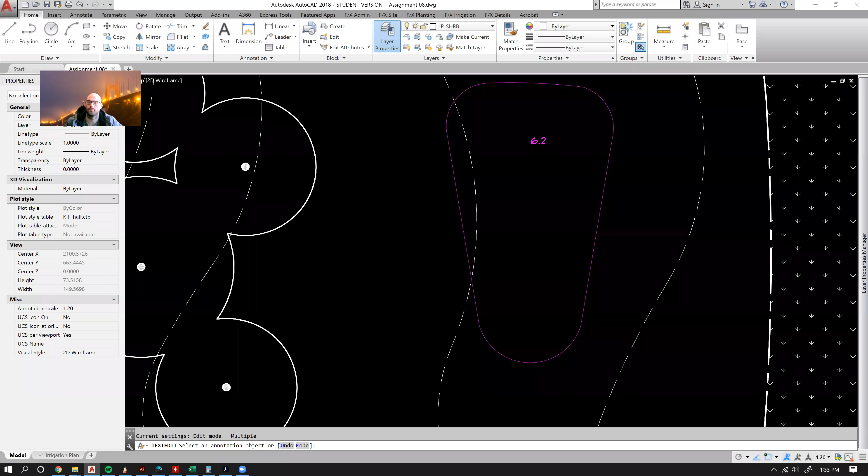So, oh man, now that just started recording. I feel like we should go through the instructions just a little bit.

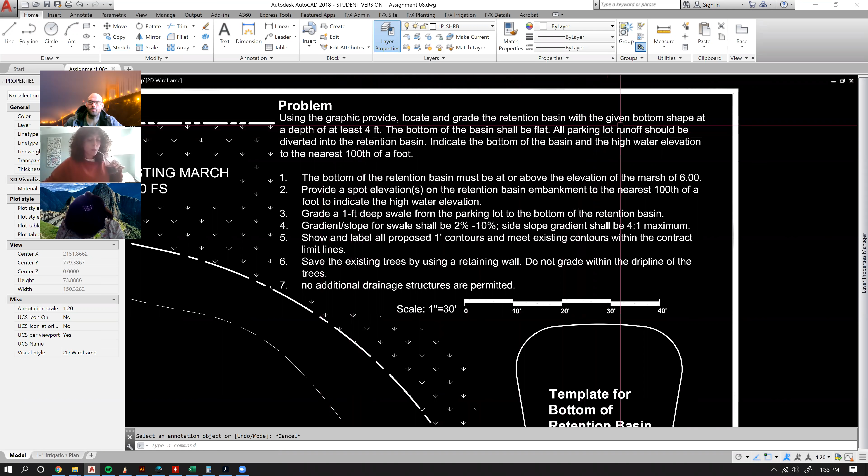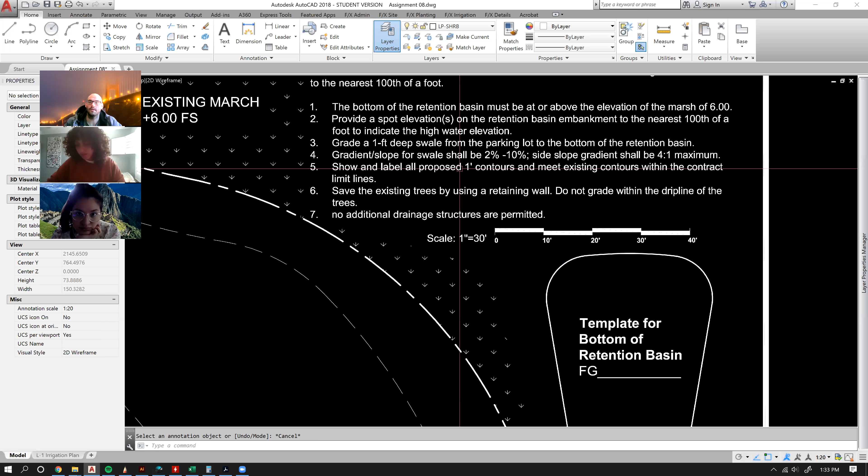So we're making a retention basin at a depth of at least 4 feet deep. All the runoff from the parking lot needs to be diverted to the retention basin. The bottom of the basin must be at or above the elevation of the marsh of 6 feet. There's a 1 foot deep swale from the parking lot to the bottom of the retention basin, between 2 and 10%, with a side slope of 4:1.

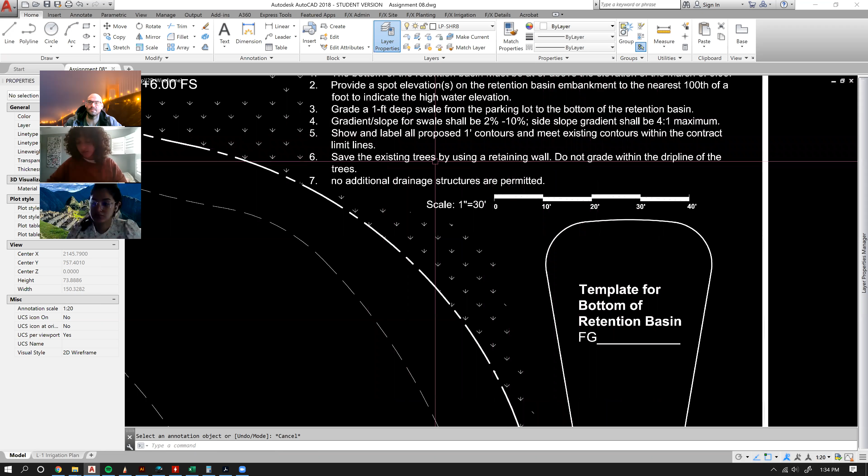Save the existing trees by using a retaining wall. No grading within the drip line of the trees, so we're not allowed to touch anywhere near these trees.

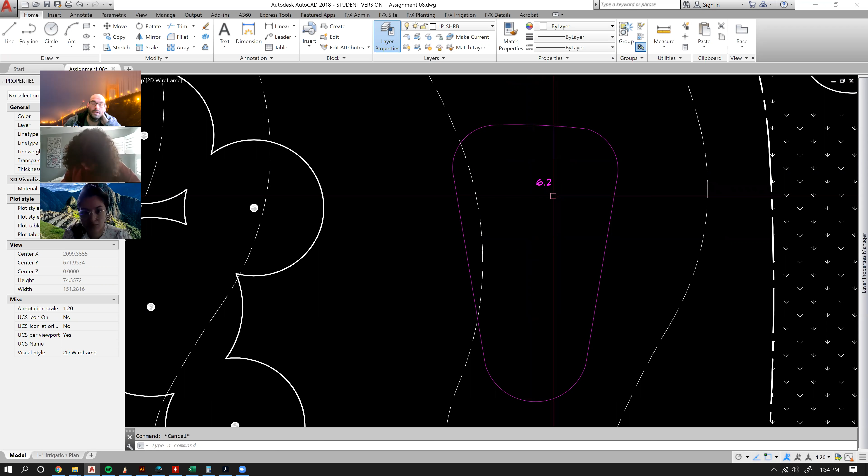All right, so we have our template for our retention basin. We're going to copy it down here, and we can put the bottom of the retention basin just above 6 feet. Let's say it's at 6.2 feet, and we'll say that's our FG.

Now we can say that this first contour line is 7, because you only show contour lines for every 1 foot, right? So we're not going to show a contour line for 6. We're going to come up from 6, and the first contour line is going to be 7. So now we only have to offset that a few times to get up to 10 feet.

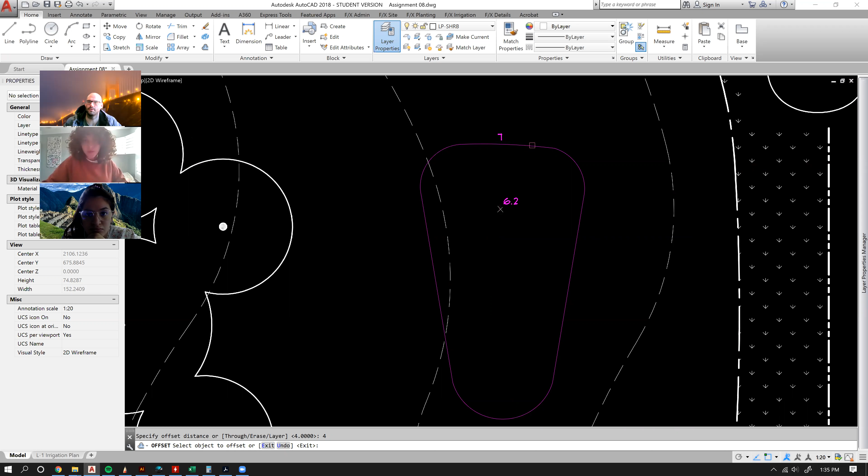Right, so we're at 7. We're going to offset 4 feet because we have a 4:1 maximum slope. So we're going from 7, to 8, 9, 10.

That's 4 feet deep, because the bottom of our thing is 6.2. And so there's kind of like an imaginary hill where the top of our retention basin comes up and then starts going back down. It's going to go above 10 feet by 0.2, just so that we have that exact 4 feet.

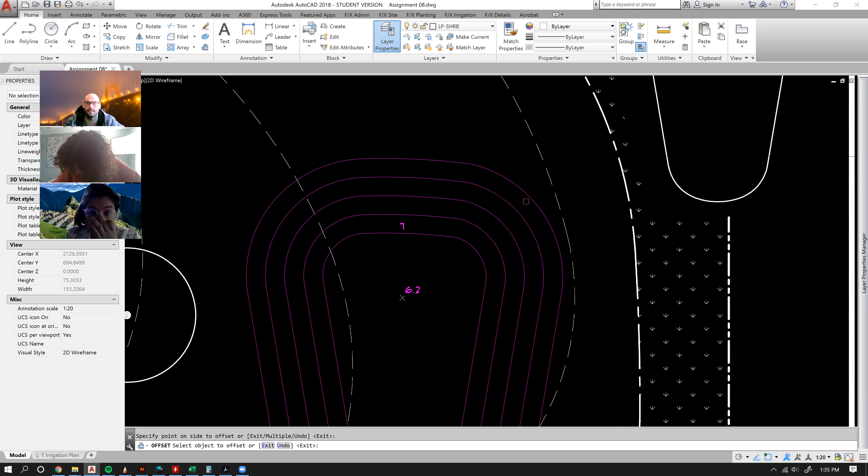I mean, we're not going to show that, we can't show that because we're not going to put a contour line at 10.2 feet. But by drawing it this way, it still maintains that 4 feet of depth. So we're starting at 7, going 8, 9, 10 feet up, and then we're going to go back downhill: 9 feet down, 8 feet, 7 feet, and then we want to meet back up with this marsh, which is 6 feet. So we need to maintain a minimum distance of 1 foot away from this marsh.

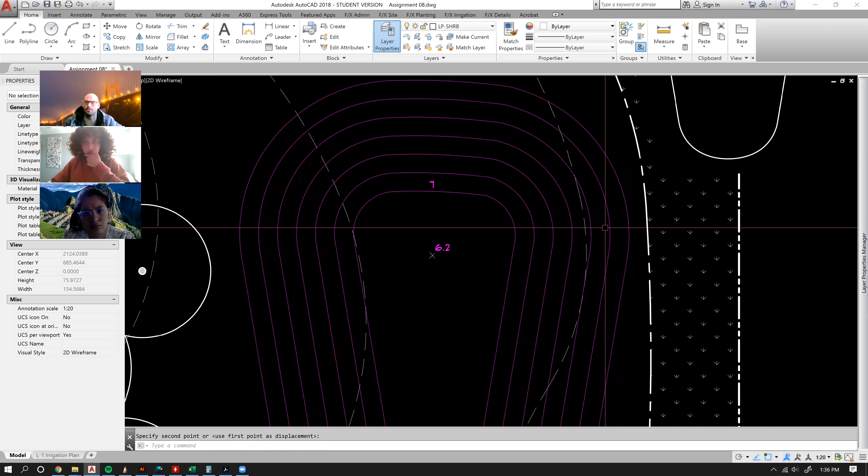Okay, so this location seems to work for our retention basin. Maybe I'll move it up just a little bit.

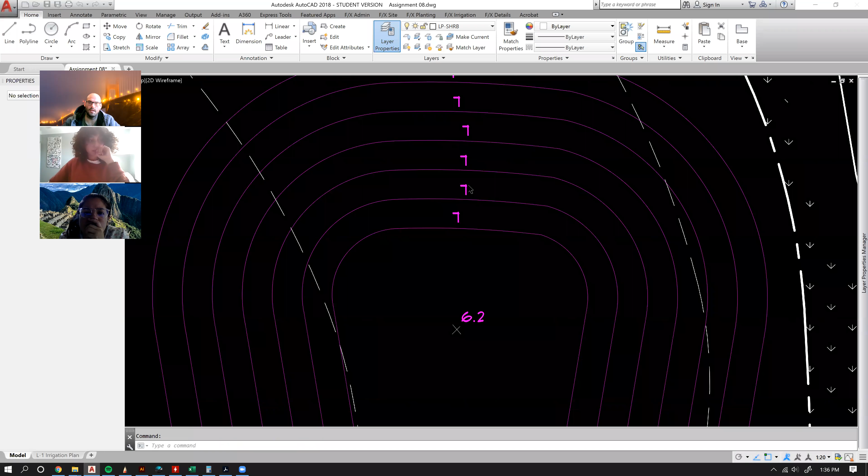And if we start labeling things, it's a bit of a mess right now because I just offset everything, but it'll start coming together as I work through it. So we have 7, 8, 9, 10, and then we're going back down: 9, 8, 7.

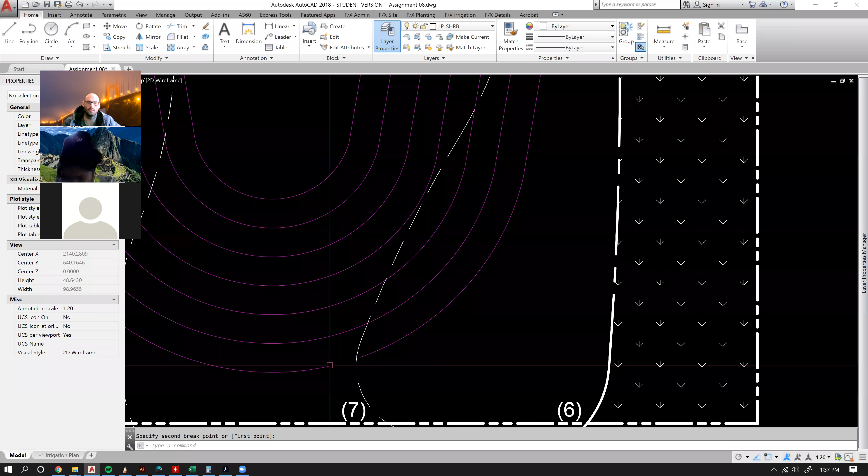Okay, so if we look at our existing contours, we can start trimming things. This is 7, so we're going to break it right there, and over here, and delete that half. So that's our 7 contour. We have 8 over here.

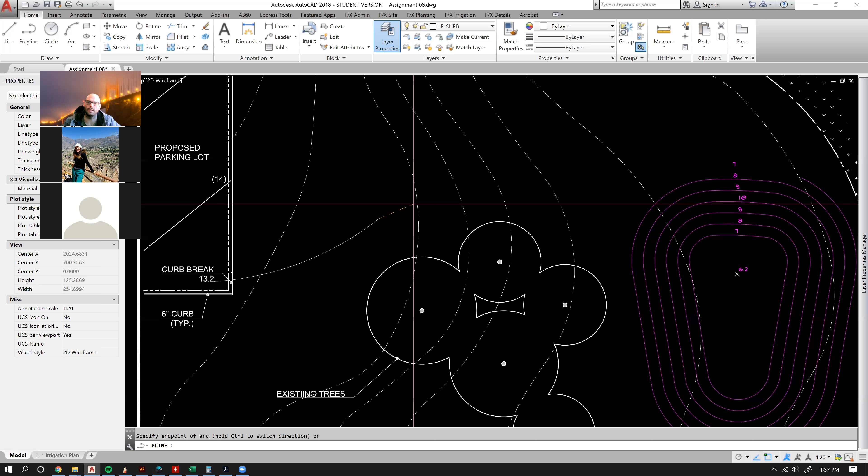This might give us trouble. We might have to redesign this entire corner to start making our swale, because our swale is going to be coming down this way, and in here. Okay, let's see if we can get rid of any other ones. Let's break this 8 over here, and we'll break this 8 over here just to get rid of it.

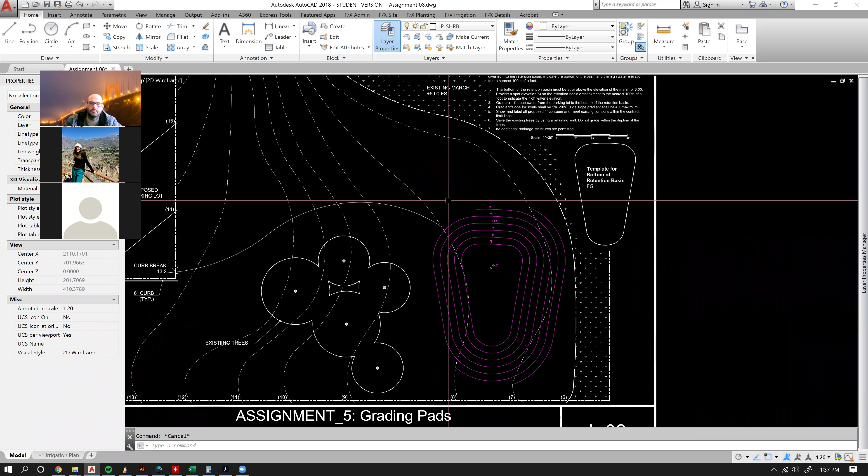9 is going to... 9 does something funky, I forget. Yes, 9 goes all the way back up and just connects with itself.

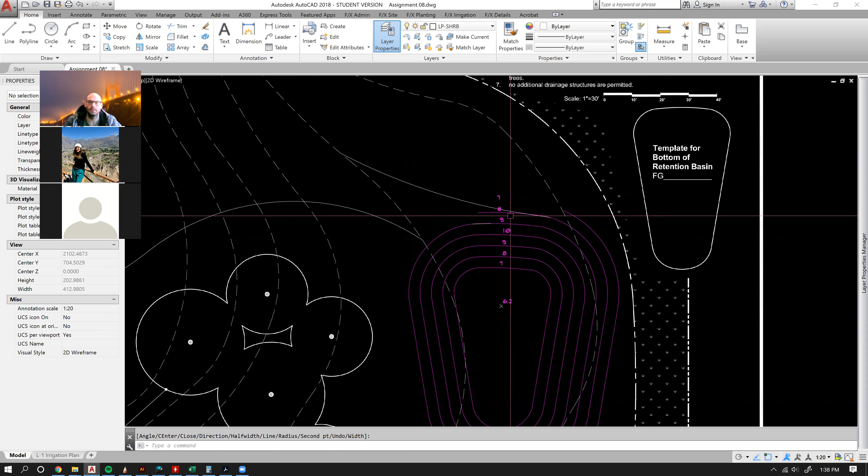So eventually, maybe I'm getting a bit ahead of myself, but 8 is going to come up and connect with itself here, and so is 9, way up here.

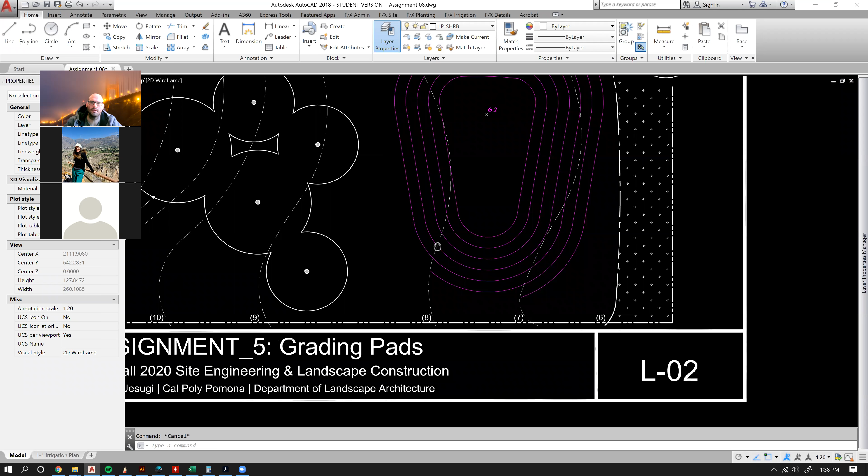Okay, and then the other side of 9, if we follow it around, it is here. It's going to die into our retaining wall. We're going to have a retaining wall here. This will be our retaining wall.

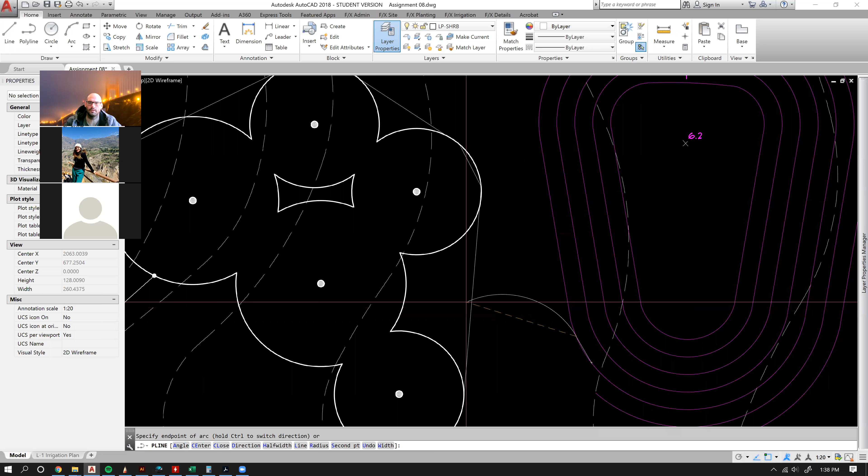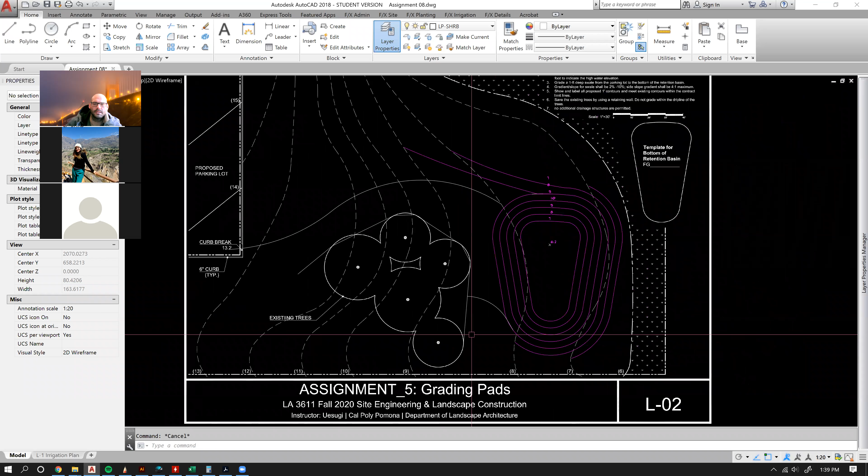And 9 is essentially just going to come right straight from here into the wall, because it's coming out through, coming up from this contour line, coming down, coming around our retention basin, and then coming back. It would probably actually go right through here, because what it's going to do is eventually meet back up with this 9 somewhere over here. So maybe it would realistically do something kind of like this and then hit our retaining wall, which is probably going to come something like that.

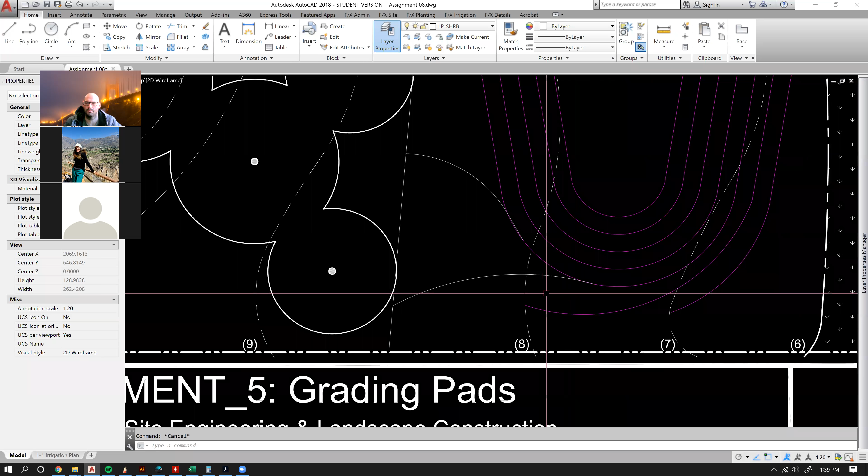8 would obviously have to maintain that spacing, so you would have something like that. It's ugly because I'm trying to be quick, but...

Is that right? Are you guys kind of following along?

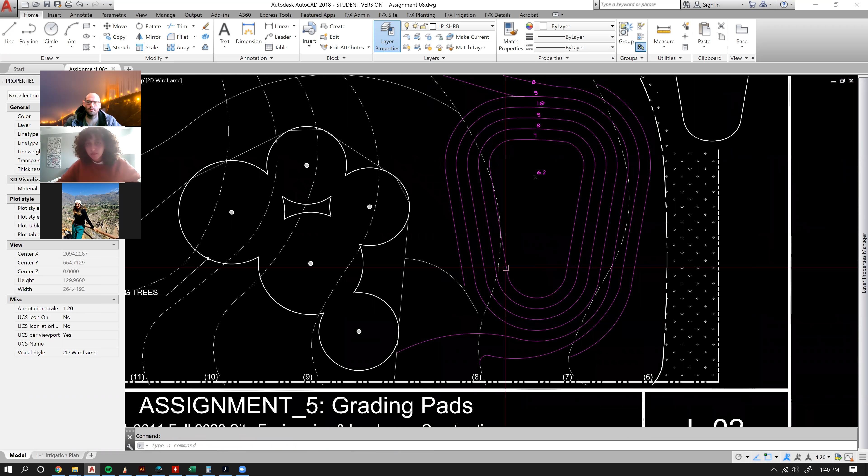9 is going to connect up here. We got to get rid of this part of it.

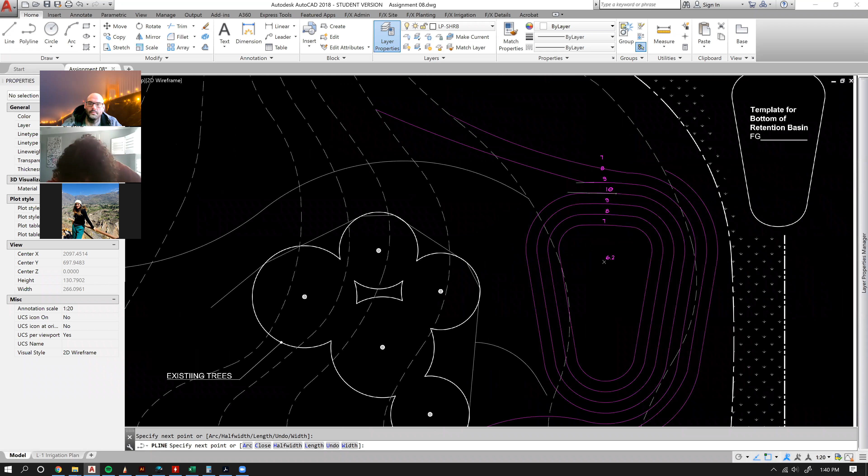Okay, so then 10, this is where we're going to have to start forming our swale. This 10 contour is the top of our retention basin, right? We're starting at 6.2 and coming up 7, 8, 9, 10. This corner, I can tell you right now, is probably going to have to come out. So if we take it and draw a little archy thing, something like this, and then back around, it's going to form the first part of our swale.

And then you can come back in here.

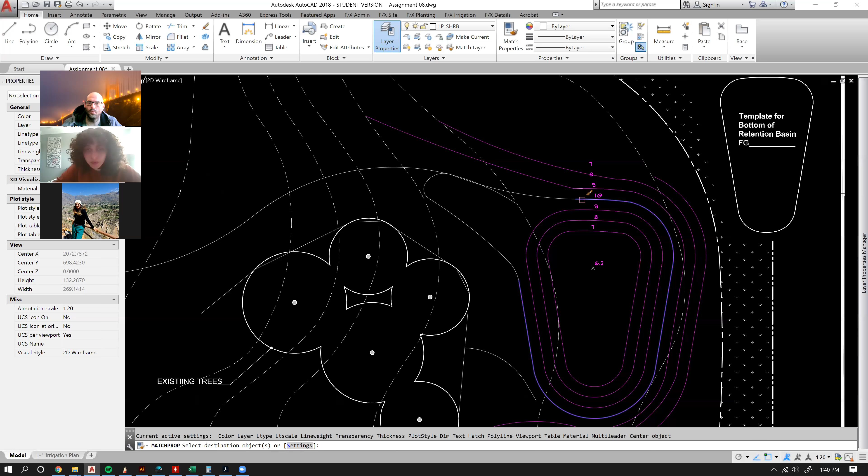That will be the form that 10 starts to take. And then we can come over here for 11 and do something like this. And tie back in here.

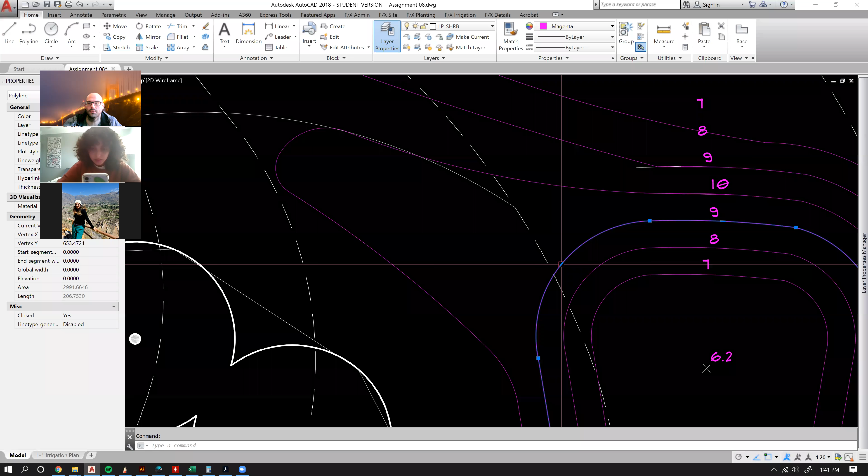For this one, you would have to measure. You might have to stretch this one out because it can't be more than 50 feet between contours, right? So I can actually measure in this program. See what I did, 43 feet. Hey, we're all right, because our 2 to 10% gives us a maximum of 50 feet. So we're good.

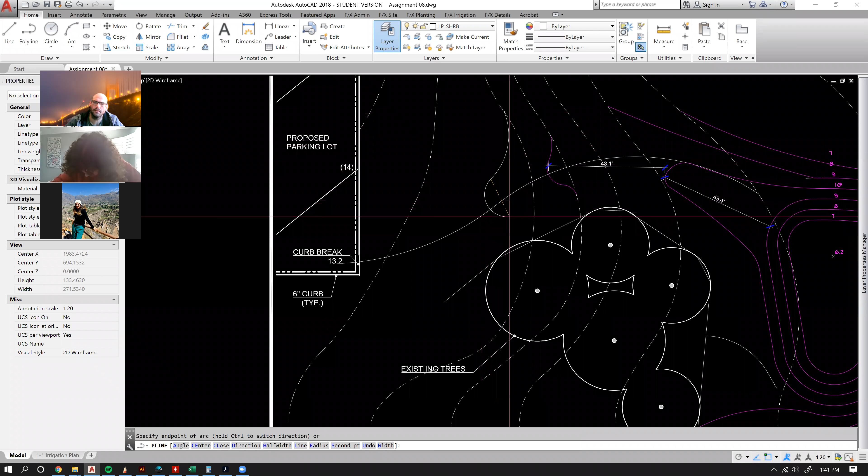So our last 2 contours, we're just going to come out, curve around like this. This one will probably end up dying into the wall. Or, no, I guess it hits itself right there, right?

And then for 13, we'll just come up, something like this, and then it'll just have to come around like this again.

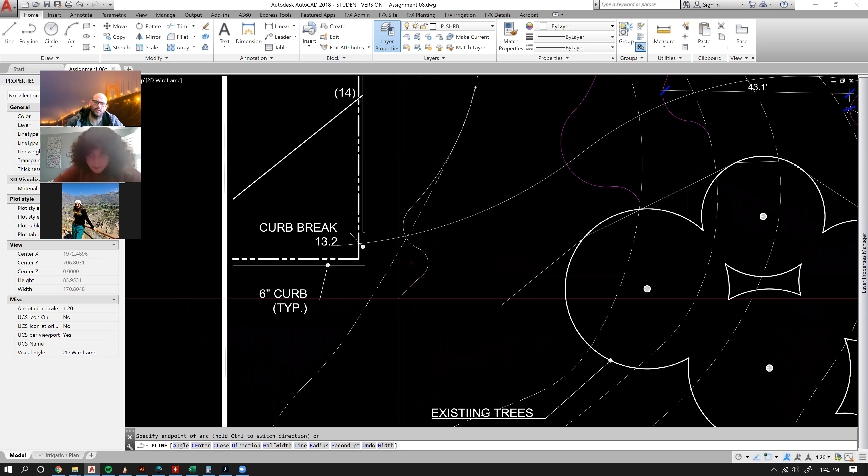And the reason why we come out like this is because we're kind of creating a ridge line right here, which in turn creates a valley over here. So the water has no choice but to take the path of least resistance. It's not going to go down this way because there's a ridge, it's going to come down this valley.

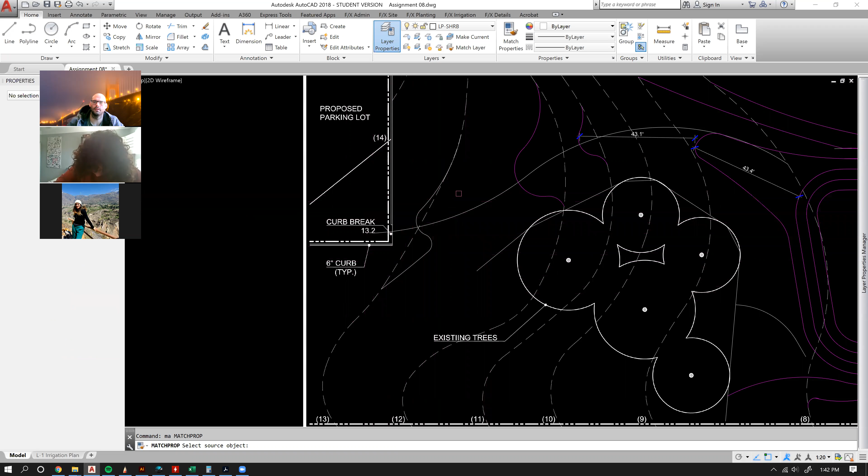And then this might be more than 50 feet. Nope, we're good. So all this works out.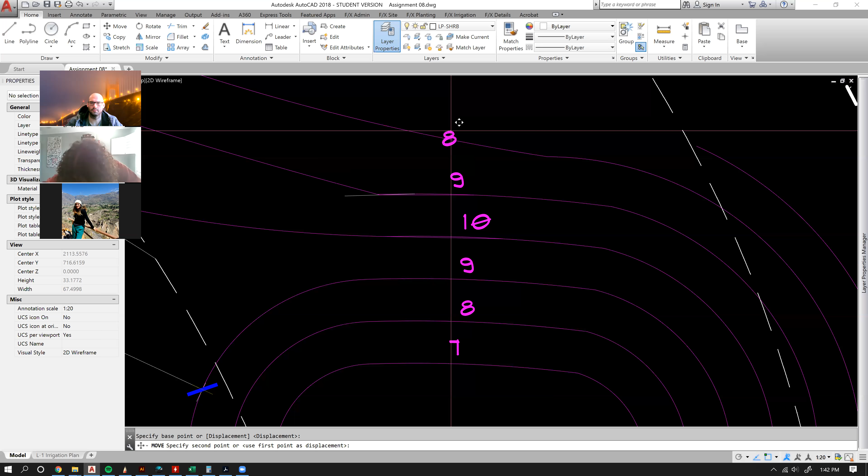And you just have to label your contours. Put them somewhere where they make sense, I guess. And yeah, I think that's all that needs to be done.

Why does the swale start taking the shape starting at contour line 10? Why doesn't it happen with 9, 8, and 7? It could—

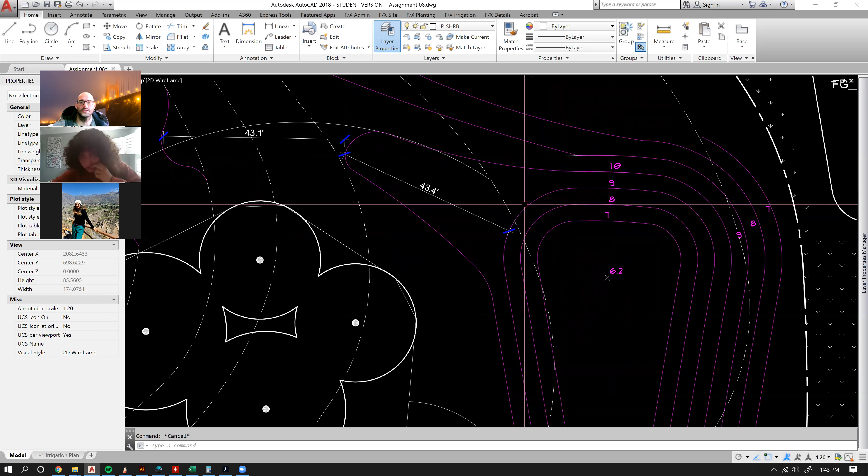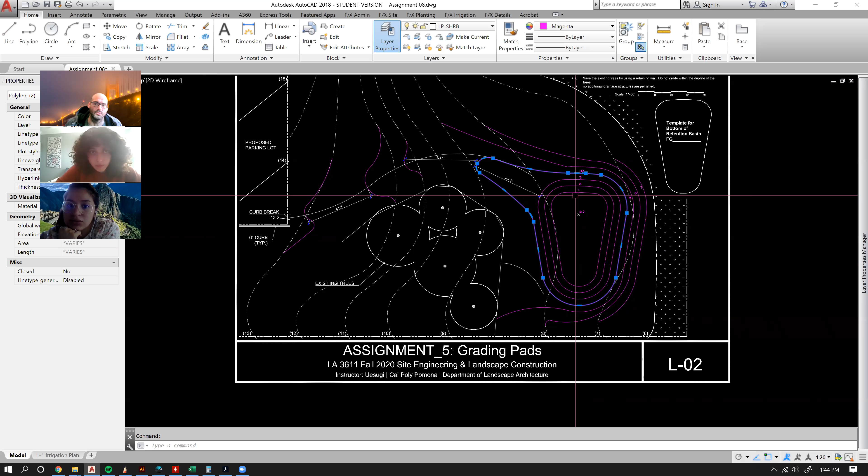I'm trying to maintain the 5 foot spacing in our retention basin as much as possible, because that's our retention basin, and we would like the retention basin itself—like if this thing filled up with water, it's going to come all the way up to my 10 contour line. It would be nice if the top of the retention basin was like a normal kind of shape. If it went way up there like that, it starts really changing the shape, and at that point the calculation of the retention basin, honestly the volume, would be extremely hard to calculate. So you would want to maintain that 5-to-1 slope as much as possible.

So maybe, to be honest, I wonder how much you can get away with. I don't know—if we took this and maintained that 5 foot spacing, I don't know what you would end up with. You might be able to increase each one of the rest of these spacings to their maximum and get it to work out. But if it doesn't, you might have to just end up moving the entire retention basin uphill a little bit to get it closer.

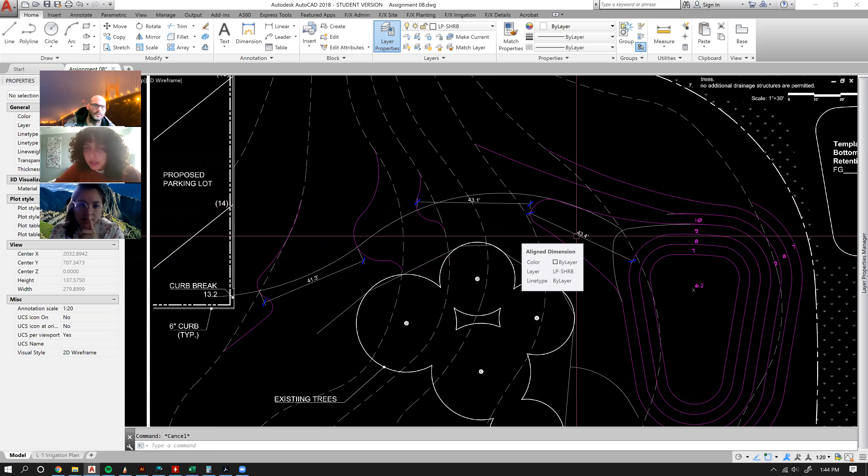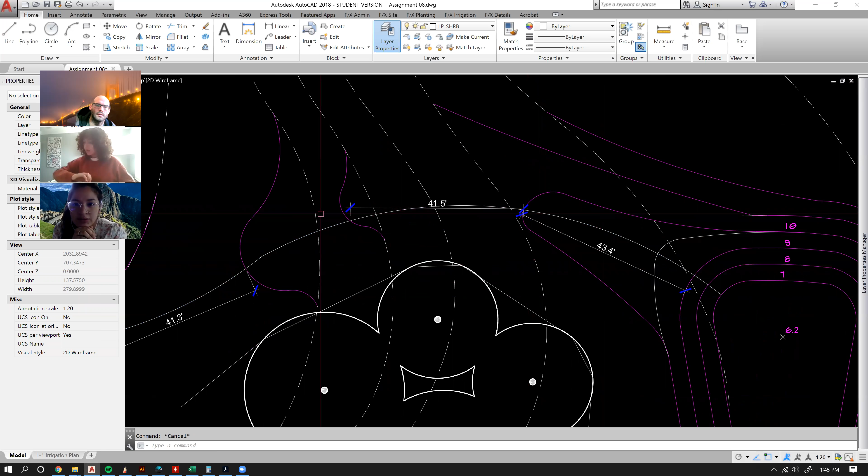Then the curve that you drew from the left side, it goes through the middle of the swale for, I guess that's 11, 12, and 13. Right, so why wouldn't it go through the middle of 10? You just moved it—right now it's supposed to go through the middle, right? It was supposed to, yeah, I just drew it wrong. Okay, right, so it goes all the way to the middle until it reaches the basin, right? Yeah, okay, I just drew it kind of inaccurately.

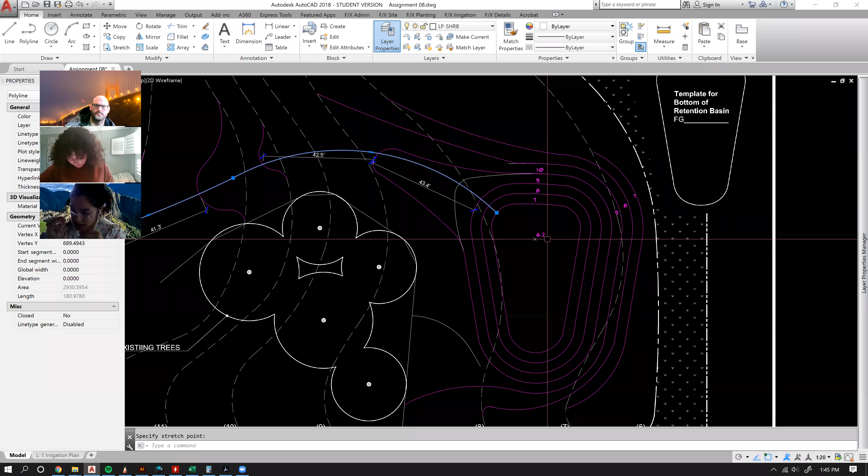Yeah, and then it would just go all the way down to the basin, probably to that point. And then you pick 6.1, 6.2, because that was just above the margin, which was 6. Right, if I could go at exactly 6, but if I started at 6, then I would have to have one more contour line. My first contour line would have to be 6, and so I would have to go 6, 7, 8, 9, 10, and then back down.

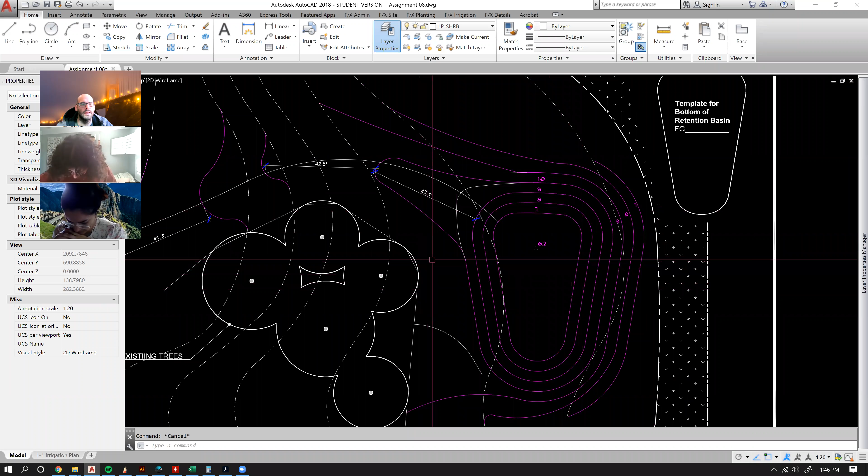And so I would end up having to move this whole thing over one more foot to the left, and it would just push it over a little bit more. It's not the end of the world—you can start it at 6. What was it, that 10 was the highest point? Because that makes our retention basin 4 feet deep.

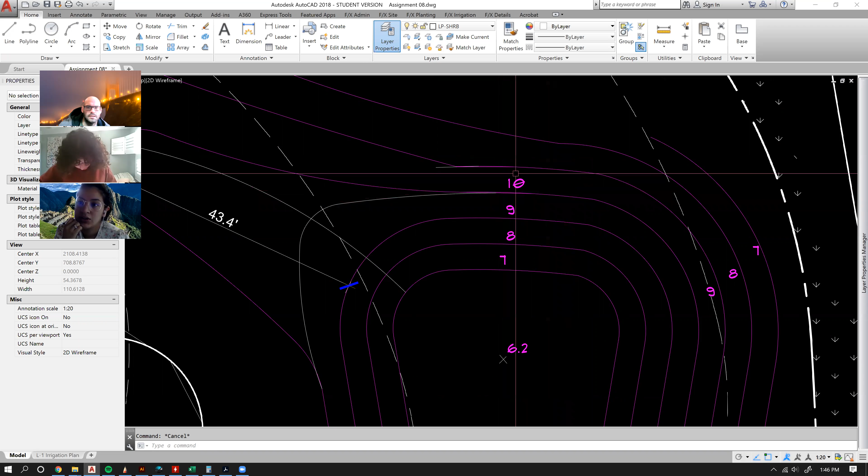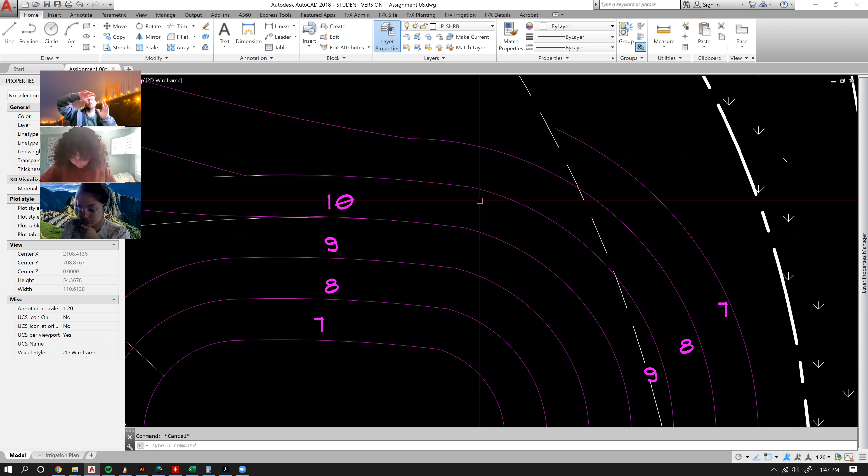Technically, in order to make it exactly 4 feet deep, the top of our retention basin would have to be at 10.2 feet, right? But we don't have a contour line for 10.2 feet. So you kind of have to imagine—maybe you can even space it. I guess technically that would cause this next contour line to be spaced out just a little bit further, because instead of being 5 feet away, you want it to come up. You want that mound, because we're coming up and then we're coming back down, right? You want it to come up to 10.2 feet and then start going back down.

And if you were to maintain a 5-to-1 slope between—if you're going from 10 to 10.2 and then back down to 9, that's more than just 1 foot of elevation, so you would end up with more than 5 feet of spacing. It would be like 1.4 feet of elevation, not even 1.2, because you're coming up and then back down. So it's 1.4 times 5, and that's what the spacing would be between those two contours.

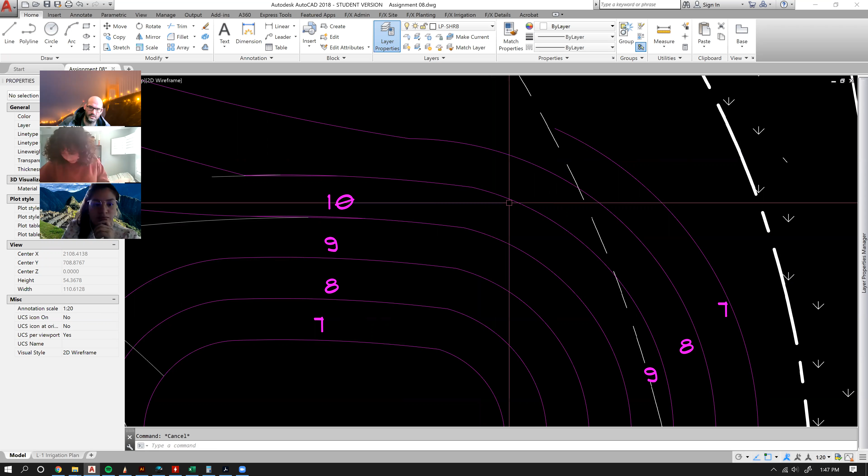Almost 7 feet, probably—so technically I'm wrong. Yeah. So then from 10 to 9, on the outside, there should be a little bit more space between them. Okay, yeah, if your bottom is above 6 feet, but that's right—or you can start it at 7 and go all the way up to 11 feet.

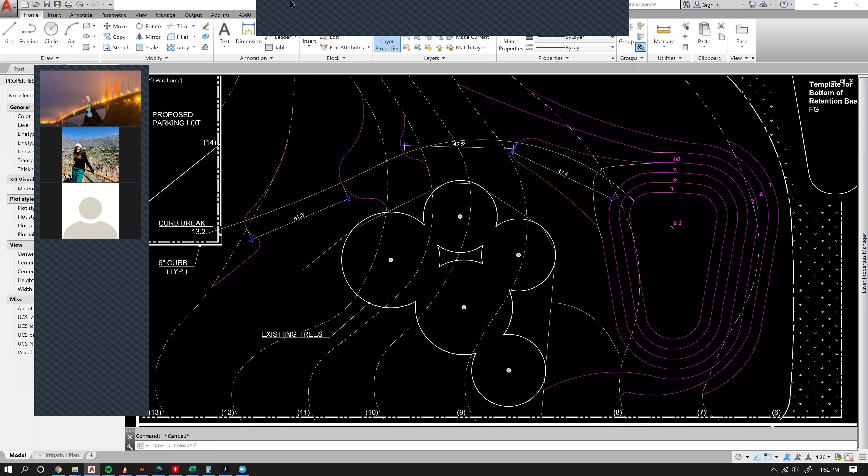Crap, I forgot to stop recording.